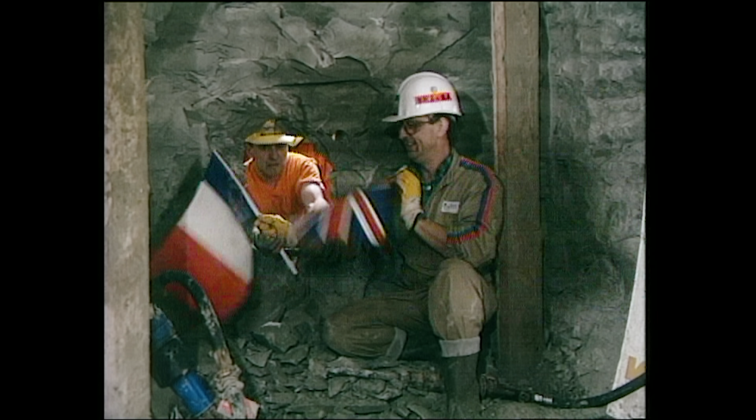2024 marks 30 years since the opening of the Channel Tunnel, or Chunnel, or as they say in Calais, Le Tunnel sous la Manche. This underground, undersea railroad tunnel connects England with France, crossing the narrowest, but still not that narrow, section of the English Channel. The tunnel allows passengers, and in many cases their cars too, to cross the channel in just over half an hour at speeds as high as 99 miles per hour.

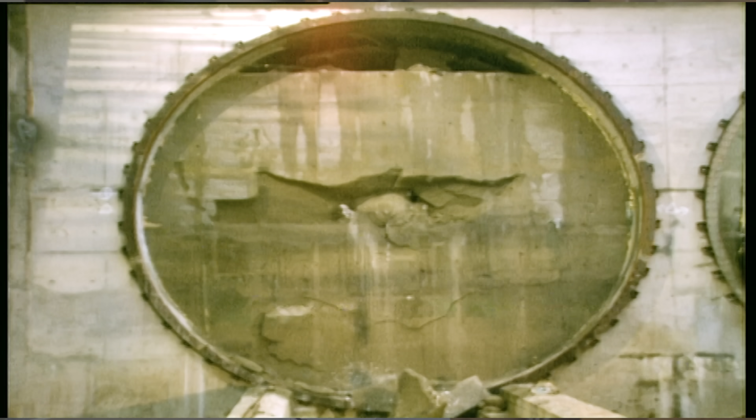While there are longer tunnels out there, this is the longest underwater tunnel in the world. When it was proposed in the mid-1980s, it was set to be the most expensive construction project ever, and like so many mega projects, it went way over budget and opened a year late. But unlike many mega projects, this one was funded entirely by private investors. That's a good thing too, because it hasn't exactly been a mega financial success.

The BBC once said that, depending on your viewpoint, the Channel Tunnel is one of the greatest engineering feats of the 20th century, or one of the most expensive white elephants in history. Elephant or not, the tunnel is legendary among engineers, and in light of the 30th anniversary, I thought it was about time I dug into it. It's a challenging endeavor to put any tunnel below the sea, and this monumental project faced some monumental hurdles, from complex Cretaceous geology to managing air pressure, water pressure, and even financial pressure. There's so many technical details I think are so interesting about this project.

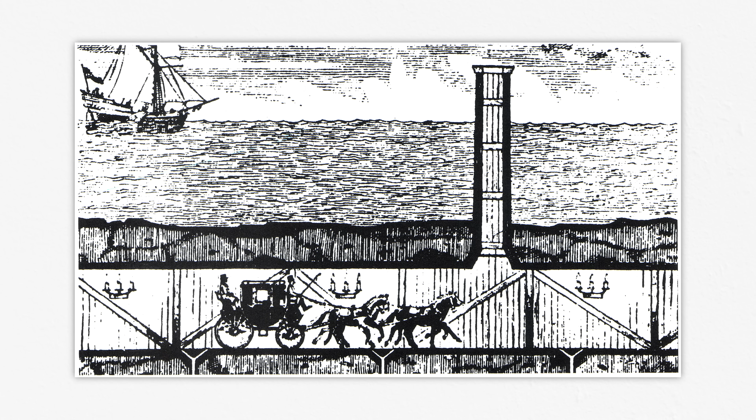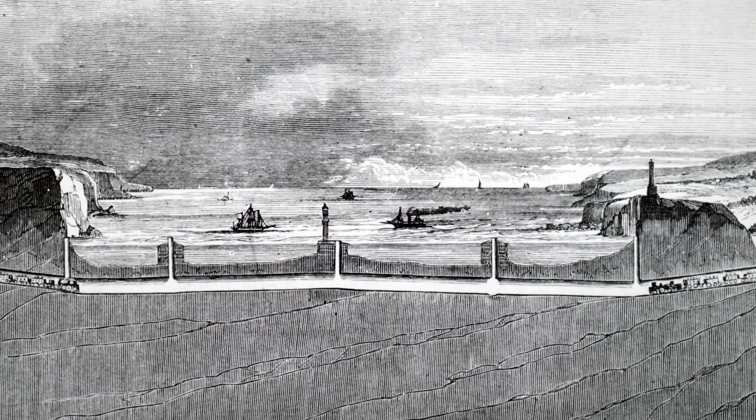The idea of building a permanent connection between England and France across the English Channel isn't a new one. An engineer way back in 1802 came up with a plan for a horse and buggy tunnel intended to be lit with oil lamps, featuring an artificial island midway for horse changes and some pretty scary ventilation chimneys. Needless to say, that idea didn't get far. In 1882, another tunnel proposal got a bit further, a few kilometers further in fact. Several thousand meters of tunnel were actually dug before political pressures regarding the fear of future potential invasions killed the project. By the 1970s, another attempt to build the tunnel broke ground, but that project fell through too.

It wasn't until the mid-1980s that the proposal for the tunnel as we know it was accepted and work began in earnest. A handful of other proposals were also considered at the time, including an even more ambitious project featuring an absolutely enormous suspension bridge 70 meters above the sea, using an exotic fiber called aramid and carrying traffic within huge concrete tubes. Unsurprisingly, this monster bridge did not get selected. The plan for an underground electric railroad connection won, and work began on the Channel Tunnel.

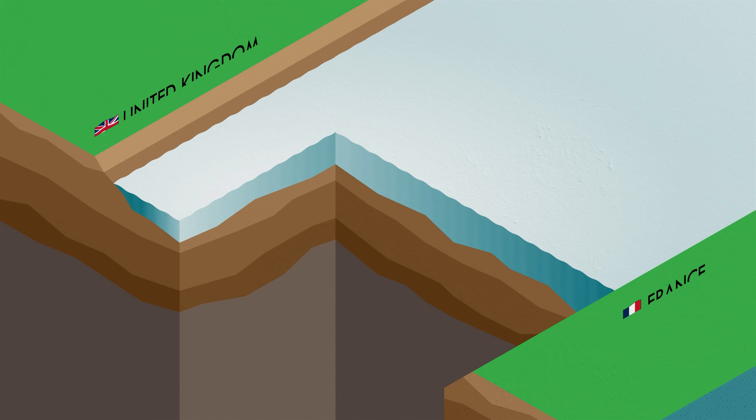But it's not so much a tunnel as 3 separate tunnels with a variety of connections between them. There are 2 main railway tunnels, each with one-way service across the channel, and a third service tunnel that runs between the 2. The 3 tunnels each began on either side of the channel, and pretty impressively met in the middle, deep under the seabed, with an offset of less than 2 feet. They were even able to incorporate some of the work of those previous failed attempts. The accuracy of this dig is even more impressive when you consider that the tunnels aren't level or straight.

The geology of the English Channel is, putting it mildly, a bit complicated. There are layers of different kinds of sedimentary formations, and the project was designed to follow the path of a layer known as chalk marl, although some geologists call it marly chalk. This layer was less permeable and had fewer cracks and fissures than the overlying material. But that doesn't mean there were no fissures. The marly chalk was the best option for tunneling under the channel, but it was still far from simple.

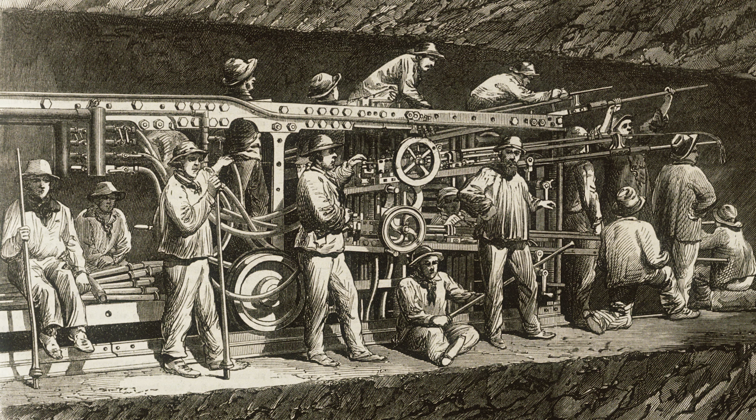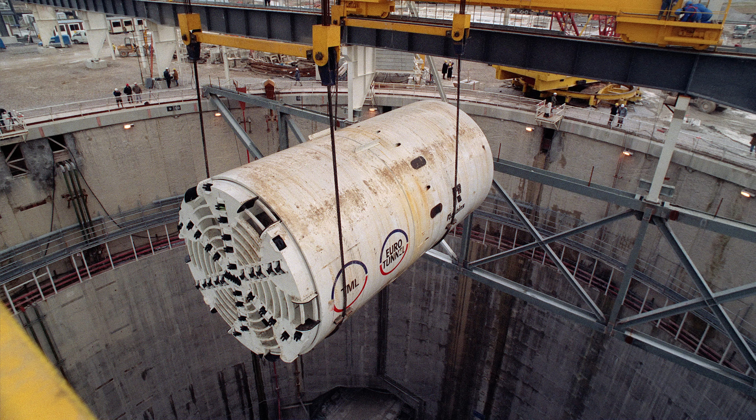In some ways, those past proposals and attempts to build the Channel Tunnel failed because the technology just hadn't reached the level to make a project like this feasible. But by the 1980s, one piece of equipment had made huge strides in efficiency and safety. With the creative flair you'd expect from any civil engineer, they're aptly named tunnel boring machines, or TBMs. Drilling is just one of the multitude of jobs that happen in a tunneling operation, and TBMs manage to combine and accomplish them all in one massive and incredibly complicated machine. There are lots of different styles and sizes of TBM, and the Channel Tunnel used a total of 11 separate machines to finish the job.

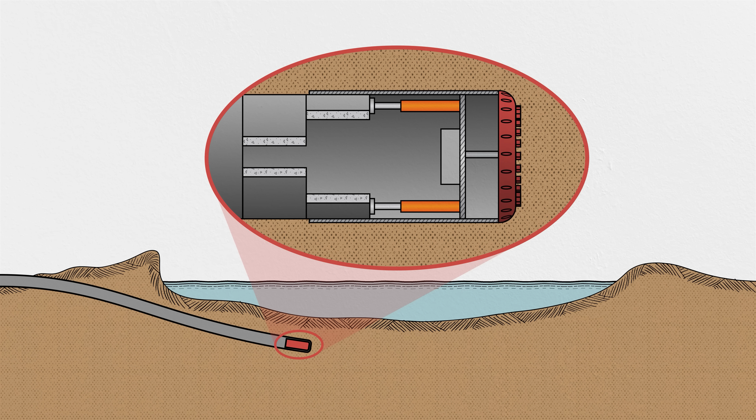Most of us are familiar with the process of drilling a hole, but doing it through soil and rock, underwater, across a vast distance, as you can imagine, adds some nuance to the process. For one, there are no drill bits that extend for miles, so the whole machine has to fit inside the tunnel it's creating. For two, there are no big hands to push at the back of the drill. Instead, tunnel boring machines grip onto the tunnel walls and use hydraulic cylinders to provide the thrust forces needed to advance forward.

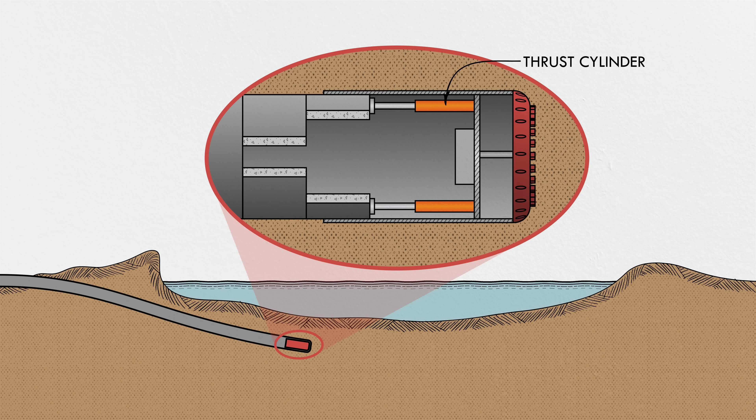For three, except in the most ideal circumstances, the hole of a tunnel is always trying to collapse. TBMs use a cylindrical shield at the front to support the walls of the tunnel until they can be permanently lined with cast iron or concrete and sealed with grout for strength and water resistance.

Also, there's pressure. The soil, rock, and water deep below the ground are under immense pressure. When you try to excavate, especially in softer soils like were experienced on the French side of the project, they have the potential to collapse or flood the operation. Many of the TBMs used in the Channel Tunnel project were called earth pressure balance machines.

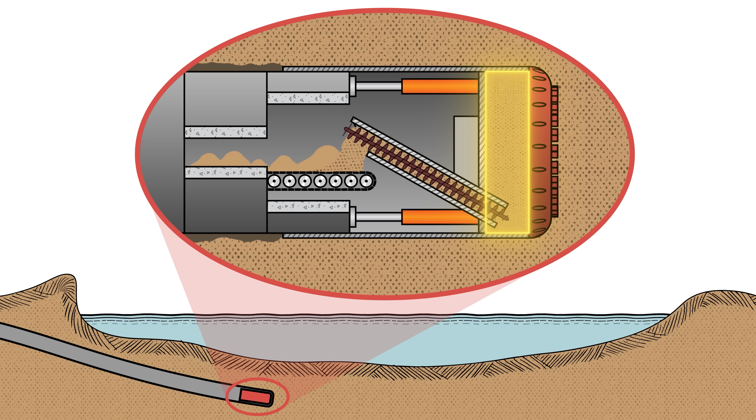Here's how they work. The rotating cutter head chews through rock and soil, allowing it to pass through openings into a chamber behind, where it's mixed into a pliable paste. As the machine moves forward, the pressure in the excavation chamber builds to match the earth and water pressure on the tunnel face, supporting it against collapse and preventing uncontrolled inflow of water. A screw conveyor creates a controllable plug. Its speed is carefully adjusted to remove only enough of the cuttings to maintain this balance.

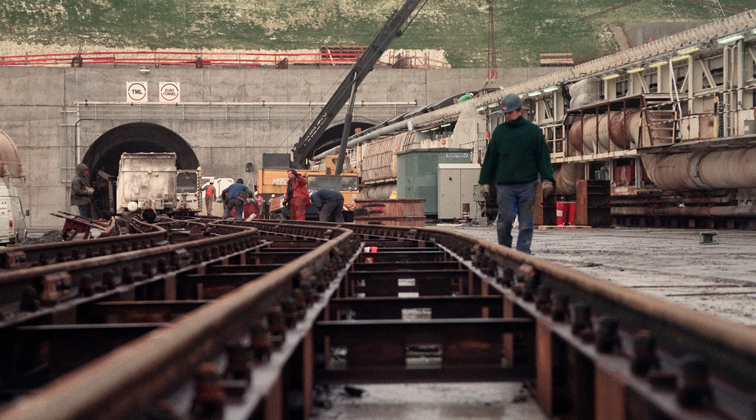Even that wasn't enough in some cases. Water flowing into the excavated tunnel was a constant problem, making it difficult to work and damaging equipment. In many cases, the crews would inject grout into the rock ahead of the machine, effectively making it stronger before drilling through it. Imagine trying to drill a hole through a big bag of rocks and water. The drill bit would be easier to push, but it sure would make a mess.

Grouting the rock ahead of the operation made it more physically challenging to drill through, but it simplified the process considerably. There are so many examples like that where tunneling knowledge and experience improved drastically just from running into problems and using trial and error to solve each one.

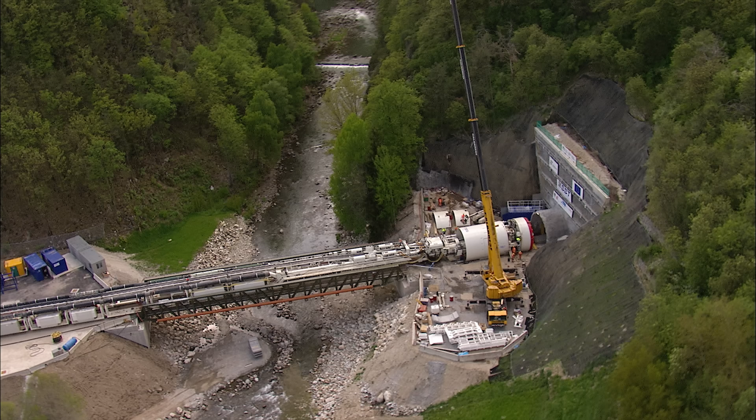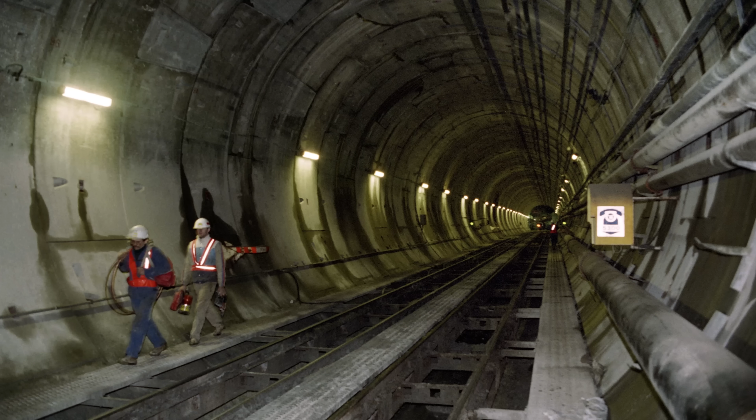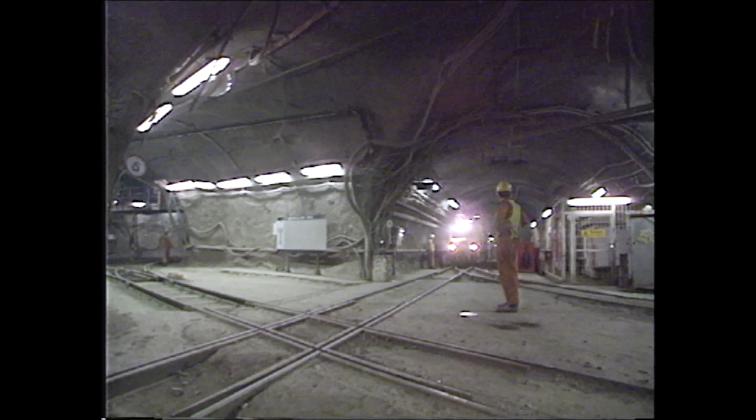Most TBMs come with a train of equipment to support and power the operation behind the cutter head and lining systems. Each machine is basically its own factory with a workshop, cranes, transportation facilities, and more. And like any factory, you need a way to get materials and people in and out. Workers, lining segments, equipment, and materials travel to the machine from the entrance of the tunnel, often over miles on a temporary railway. And all the excavated spoils have to travel the same distance, often on conveyor belts in the opposite direction.

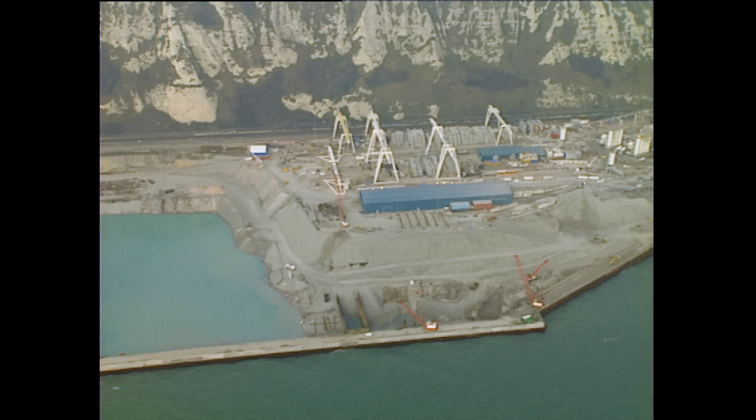On the French side of the Channel Tunnel, the spoils were pumped as a wet slurry to a nearby area known as Fond-Pignon. On the British side, the spoil was used to construct an extra 111 acres of New England. Well, not New England, but a portion of England that was new. This is now the site of the UK side's cooling plant, but also a new nature reserve called Samphire Hoe.

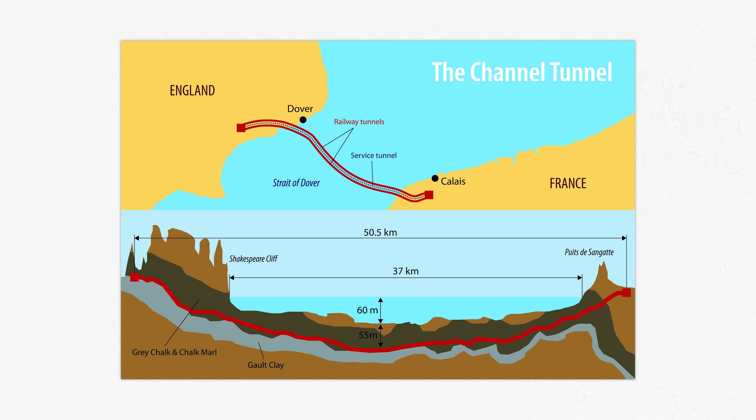Keeping the tunnel headed in the right direction was another challenge. For one, they needed to stay in the right geological layer to reduce the challenges of drilling through unstable ground. Of course, engineers had mapped the geology ahead of time, but only using core samples from the surface. Those cores only provide a thin, tiny snapshot of what lies below, like trying to navigate a car by looking through a paper towel tube.

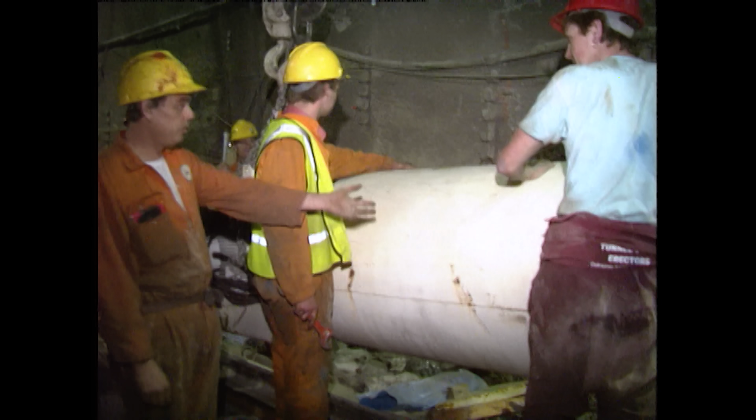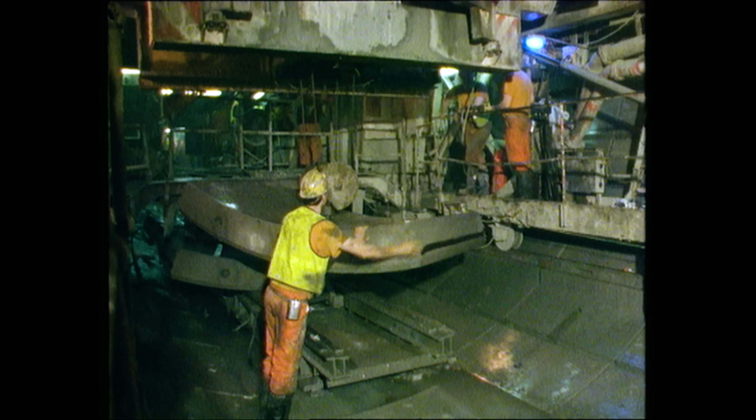And for two, they were drilling from both directions with the goal of meeting in the middle. The TBMs were guided with a sophisticated laser system to keep them on track as they tunneled through the marly chalk. Without a direct line of sight to the surface, surveyors had to set benchmarks along the tunnels with extreme accuracy. Any error in the measurements would propagate since there was no way to close the loop. Crews also regularly took core samples, horizontally and vertically, along the way to keep the tunnel within the target geological layer.

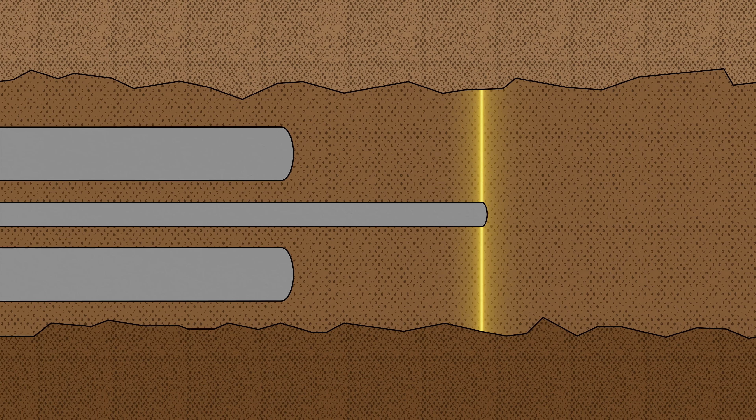One of the ingenious parts of the Channel Tunnel design was for the service tunnel to lead the rest of construction. In a way, this tunnel was the pilot. It was a way to explore the geology with less risk, encountering the challenges on a smaller scale before making progress on the main tunnels. It was also a way to confirm the guidance and ensure that the tunnels were aligned properly when they met in the middle, which, to the relief of many, they famously did in 1990. For the first time since the Ice Age, there was a dry land route from mainland Europe to Great Britain.

Several of the TBMs were left and buried underground after they finished, since the cost of getting them out was too high. Now they serve as an electrical earth connection. Connecting a hole in the ground all the way across the channel is only part of the story, though. Many more engineering challenges lay ahead.

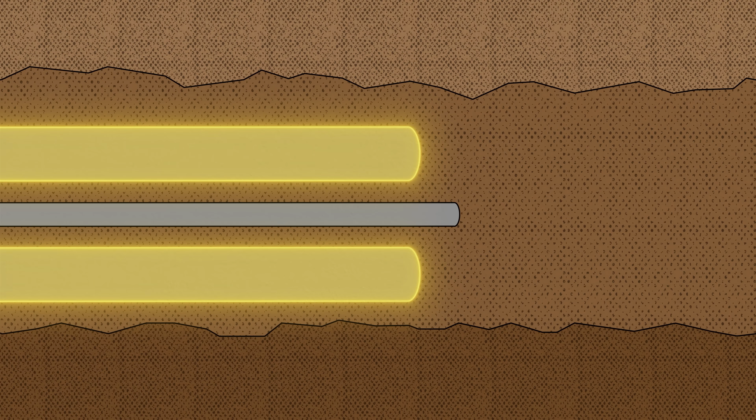As I mentioned, there are 3 tunnels. 2 large one-way rail tunnels with diameters of 7.6 meters, nearly 25 feet, with a 4.8 meter or 16-foot diameter service tunnel running between them. But that's not all the tunnels. There are two enormous crossover caverns where the two rail tunnels merge.

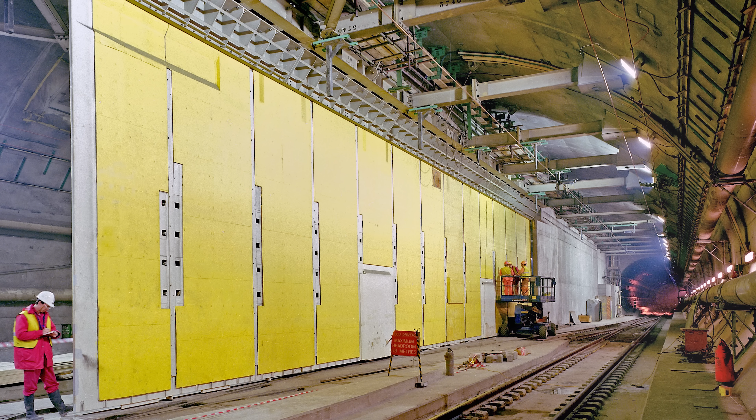During normal operation, gigantic steel doors keep the two sides separated, but they can be opened, allowing trains to cross over from one tunnel to the other. This means the tunnel can shut down large sections without the need to fully suspend train service.

The service tunnel connects both rail tunnels every 375 meters with cross passages. These allow for emergency escape from the rail tunnels should an accident or fire occur. And they've been used for evacuation in several cases in the past 30 years, including fires in 1996 and 2008. The air pressure in the service tunnel is higher than that in the rail tunnels, so smoke can't travel in.

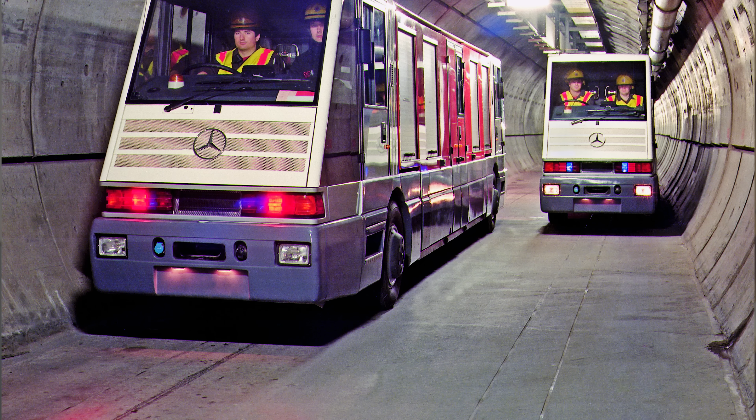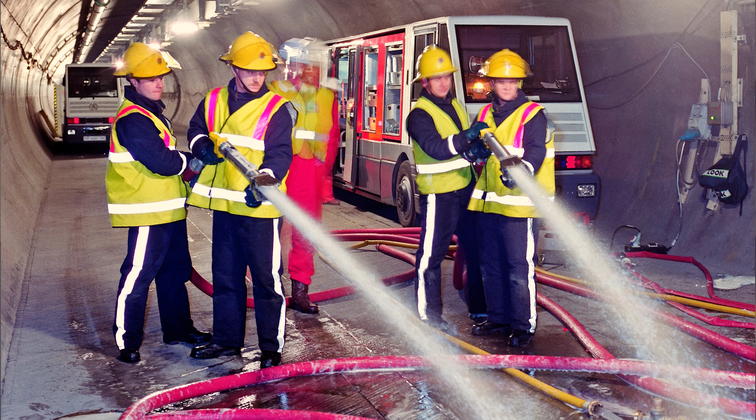There are special rubber-tired vehicles that are kind of like miniature trains called the Service Tunnel Transport System, or STTS. Of course, passenger egress is possible with these vehicles, but they're primarily, and ideally, used for shuttling staff to various locations along the tunnel. Another engineering problem is created by the nature of trains passing through very long tunnels.

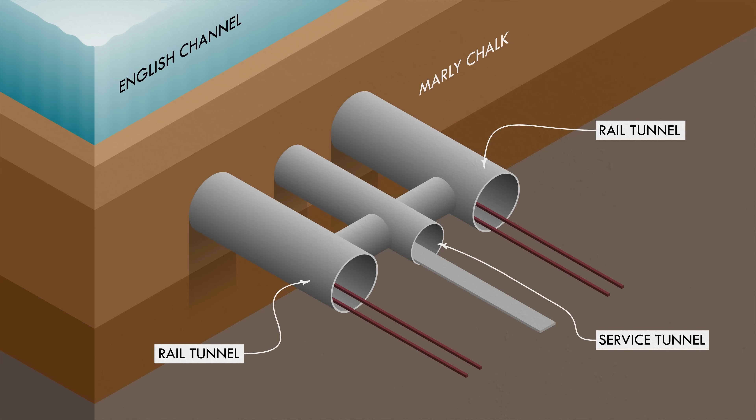On ordinary outdoor tracks, the air in front of a train gets pushed aside fairly effortlessly by the leading face of the locomotive. In a tunnel, the train acts kind of like a big piston, driving a pressurized slug of air in front of it the whole way down the tube. The rapid fluctuations in air pressure create drag on the trains, affect passenger comfort, and mess with ventilation systems.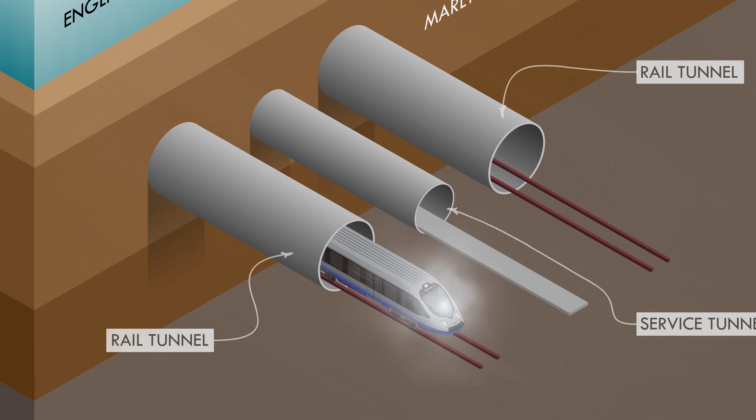To solve this piston effect problem, a series of 2-meter wide connections called piston relief ducts allow for controlled passage of air from one tunnel into the other, giving that chunk of air a place to go instead of just riding in front of the locomotive the whole way. A funny part of the engineering of the tunnel was investigating whether this long tube with regularly spaced holes would function like a big flute. Thankfully, it didn't end up being an issue.

Getting fresh air along the tunnels is another concern. And here again, the service tunnel shows its value. In addition to providing access to maintenance vehicles and an evacuation route, it also acts as a duct, delivering fresh air along the length of the main tunnels, allowing the stale air to discharge at the tunnel entrances. There's also a supplementary ventilation system that can pump air directly into the rail tunnels in the event a passenger train becomes immobilized. Along with ventilation, the tunnel also has to manage heat.

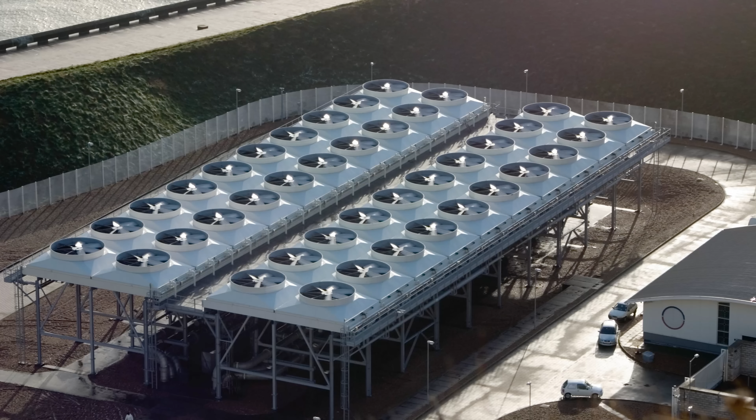The trains use electricity for traction, but some of that energy is lost as heat through inefficiencies and friction. In ordinary railroad situations, this would be no big deal since the atmosphere can easily dissipate this heat. But engineers estimated that the trains would raise the temperature in the tunnel to 122 Fahrenheit or 50 Celsius. So the project also required Europe's largest cooling system.

Enormous chilling plants were built on either side of the tunnel, and miles of pipes carried chilled water throughout the tunnel at a cool 95°F, 35°C. Air conditioners on the trains bring this down to something more bearable for passenger comfort, rejecting more heat that has to be managed by the tunnel cooling system.

Of course, being a rail link between two countries, the Channel Tunnel is flanked by enormous rail terminals on either side, one in Folkestone, UK, and an even larger terminal near Calais. There's a shuttle that allows passengers to bring their vehicles along with them, effectively connecting the highways of France and the UK at the terminals. There's also a passenger train service that crosses through the tunnel, and with the addition of High Speed 1 or HS1 in 2007, it's now possible to take the train from London to Paris and beyond.

The ordinary shuttle trains run on a loop, meaning that at each terminal there's a track that goes from the exit of one tunnel, loops around, and then enters the other tunnel. In order to avoid uneven wheel wear from always turning in one direction like a NASCAR race, the French side features a crossover, which makes the whole tunnel loop into a huge figure 8.

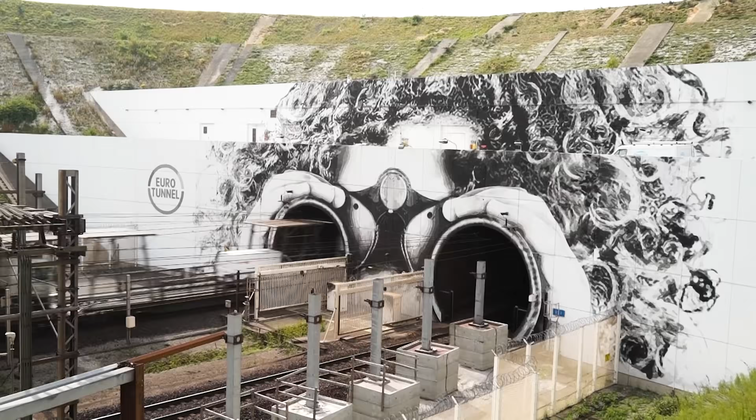People aren't the only cargo that passes through the Channel Tunnel, though. Freight makes its way as well. There are services for heavy trucks that get placed on trains, and there's even a club car for the drivers to hang out in during passage under the channel. Full-on freight trains also pass through the tunnel, with service continuing past the terminals on either side.

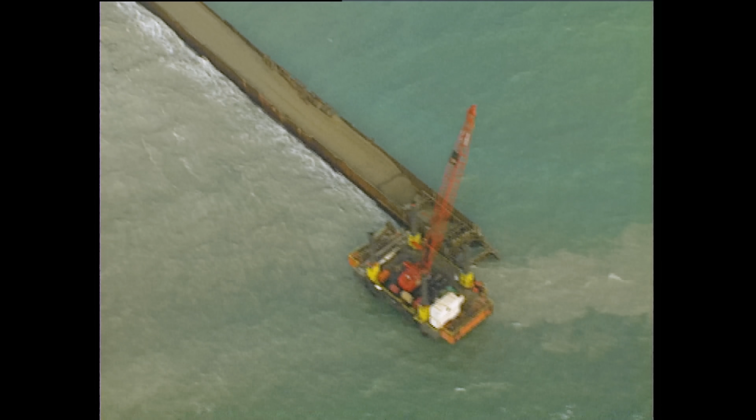Clearly, the Channel Tunnel is a triumph of modern civil engineering, and engineers around the world study its design and construction today. It wasn't all something to celebrate, though. Like so many megaprojects, there was a human cost to building the tunnel. More than 10 workers perished in the construction of the project.

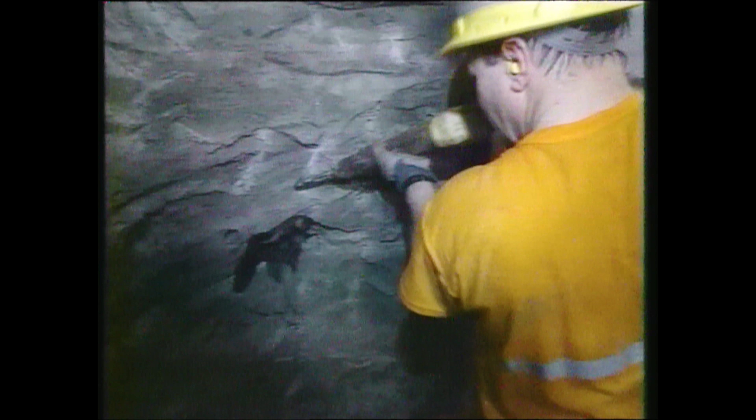Of course, it is absolutely unacceptable to trade safety for construction speed, even on the biggest construction project in the world. And after multiple lawsuits and investigations, things improved, and the remainder of the project saw far fewer safety incidents. The tunnel has also played a complicated role in illegal immigration and asylum seeking in the UK, including some tragic incidents involving migrants. The project also went significantly over budget, which is saying something since it was already slated to be the most expensive construction project in history.

I have a whole video that talks about some of the reasons projects like this end up costing more than we expect, so I won't go into all the details here. The Channel Tunnel is unique in that it was privately funded, unlike most large infrastructure projects of its kind. The vast majority of the financial burden and risk was taken by banks and individual investors, and there was even a public offering. There aren't many infrastructure projects that you can buy a share of. Over time, the tunnel has slowly turned a profit, but it's been less lucrative than predicted.

While it may be the most epic way to cross the English Channel, it certainly isn't the only way. Discount airlines in Europe are far more prevalent than they were in the 1980s, and in many cases, it is more desirable and economical for travelers to just fly, especially if their ultimate destination is not the south coast of England or the north coast of France. Plus, for thousands of years, people have crossed the channel by sea. Ferries are still a totally viable and economically competitive way to cross. It might seem a little crazy to choose a ferry over the sense of wonder and delight that comes with passage through one of the most incredible tunnels in history, but maybe some people just like boat rides.

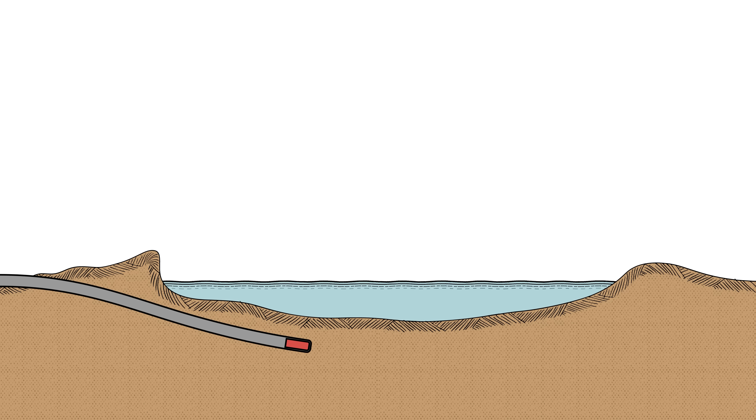I'm an engineer, so I see the achievement through a technical lens. It is without a doubt one of the most spectacular engineering feats of history. For me, that's worth celebrating in its own right. From the intensive geological research leading up to the project, to the massive TBMs eating through so many miles of marl, from the creative ventilation and piston relief systems to the unsung hero of the service tunnel. Whether or not it was a strictly practical idea, I'm glad it's there. I haven't had the opportunity to travel from Folkestone to Calais just yet, but if and when I do, I know how I'm getting there, and it's not a ferry.

One thing that's kind of hard to keep in mind about the Channel Tunnel is that when it was built, there was almost nothing like it in the world. There just aren't that many tunnels this long across the globe, and most of them were built after the tunnel. There were no 30-mile-long undersea tunnel experts. In many ways, it was an experiment, and for me, that's one of the coolest parts of engineering, using our understanding of math and physics to execute an idea that's never been tried before.